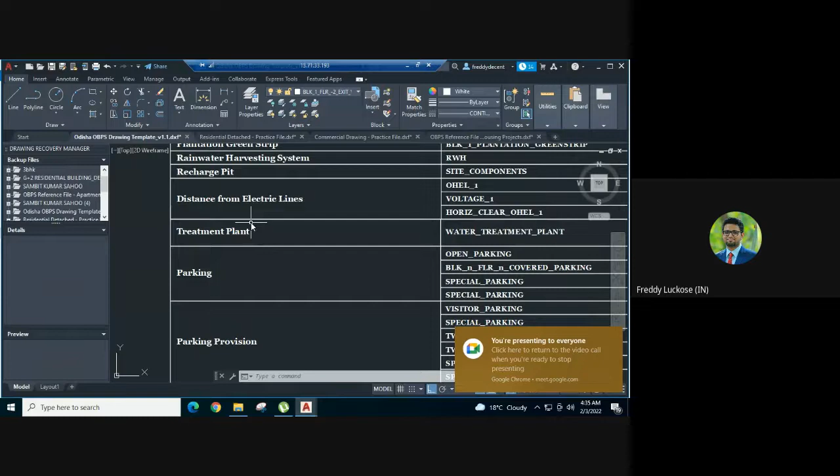The next provision that we look at is treatment plant. If your project has a water treatment plant or sewage treatment plant, you will use the layer name water underscore treatment underscore plant. For water treatment, it is color code 1. For sewage treatment plant, it is color code 2.

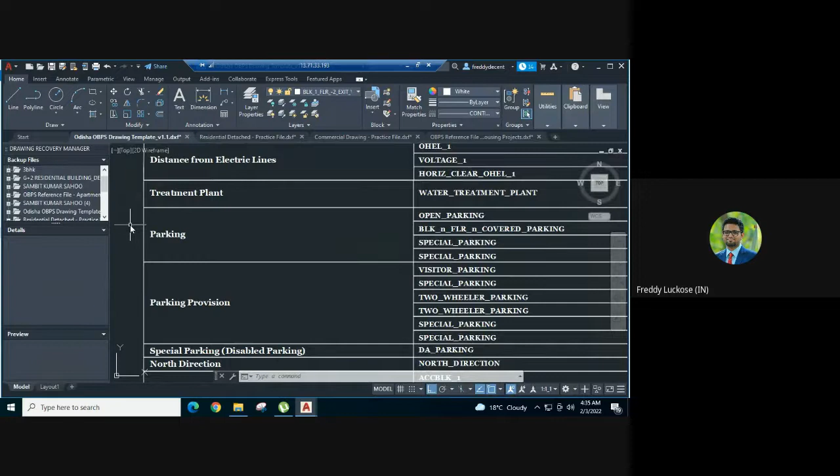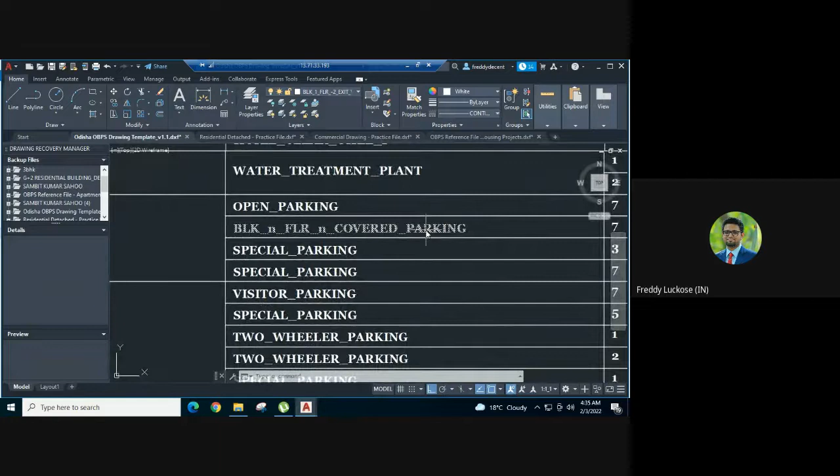Moving on, coming into one of the important features that we have in bylaws, that is the parking type. There are 4 different parking types that you can make in Sujog OBPS: open parking, basement, stilt, and rooftop parking. Based on your design, you can select either one or multiple according to your design, and you can make the required polygons to show the area of your parking.

If you have open parking, you will use the layer name open underscore parking. Similarly, for basement, it is block 1, whatever the block is, and floor, it will be -1, -2, -3, but it will have minus as a factor here. Then if it is stilt parking, you will use special underscore parking with color code 3. And if it is rooftop parking, you will use the same layer name, but it will be color code 7.

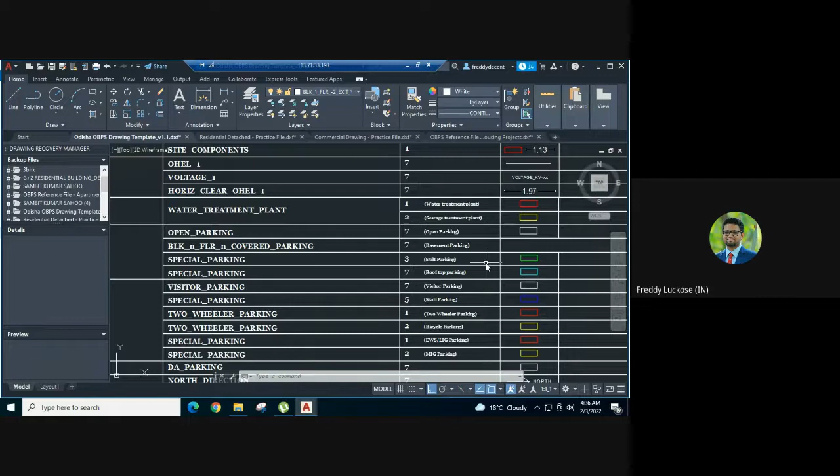So based on the polygon and the layer name that you make here, the system will calculate the total parking requirement. And if the combination of these different parking types meets the total parking requirement, the scrutiny will get accepted.

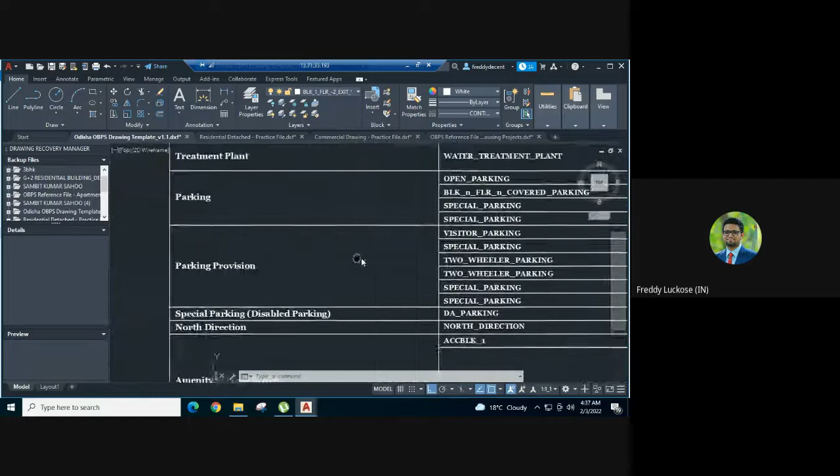Moving ahead, we also have different parking provisions. These will get activated automatically based on the bylaws and the project type that you are making. If in your project visitor parking is mandatory, you can use the layer name visitor underscore parking with color code 7. Similarly, we have layer names for staff parking, two-wheeler parking, bicycle parking, EWS LIG, and MIG parking. Based on the mandatory requirement according to bylaws, this will get automatically detected, and you will have to provide the polygons on top of the parking type.

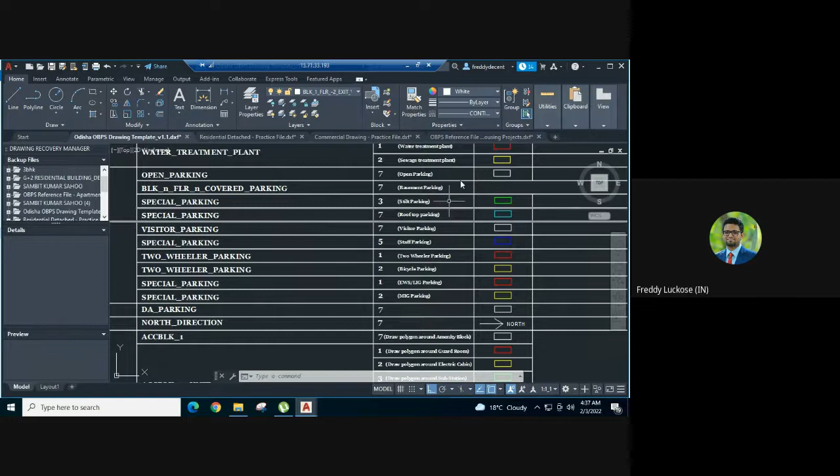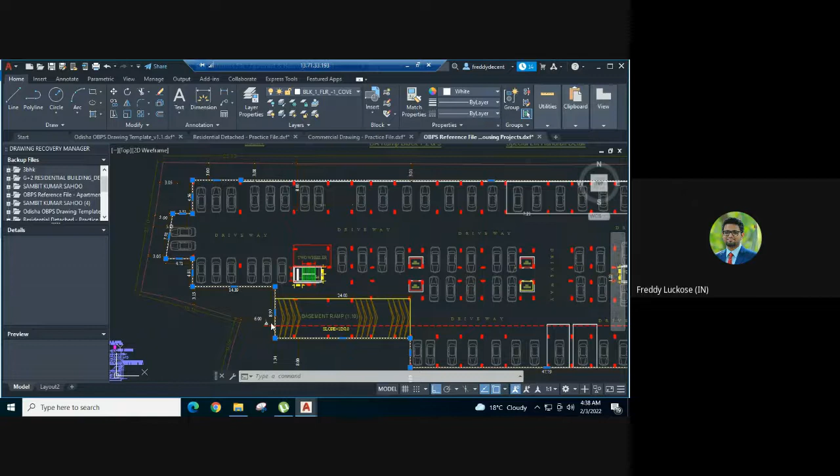So if I could show an example, this is an apartment project which has a basement and -1 floor. The first thing we do is show the entire parking area for this project. I have selected this layer that I've already made, called block 1 floor -1 covered parking, and this denotes the basement parking area, with color code 7. Inside it, for all the different parking provisions, I've also made a polygon, and that is meant for the two-wheeler parking provisions.

As you can see, I've made a polygon for two-wheeler parking, and the color code is 1.

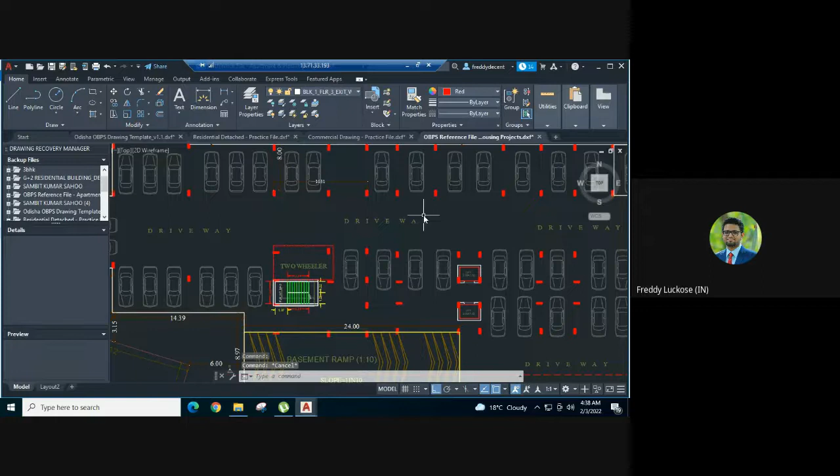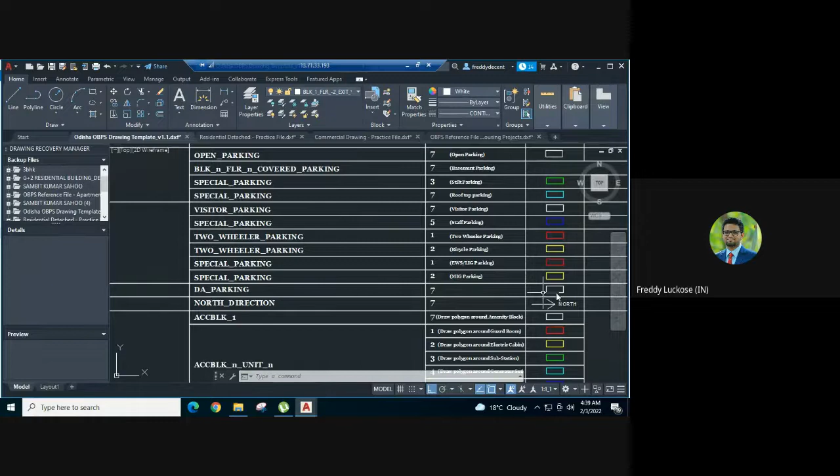Now moving ahead, we have the special parking or the disabled parking provision. There are 2 components to this. One is the polygon that you have to make for the DA parking count and the width. Based on the area of this polygon and the width, the system will scrutinize and give accepted or rejected.

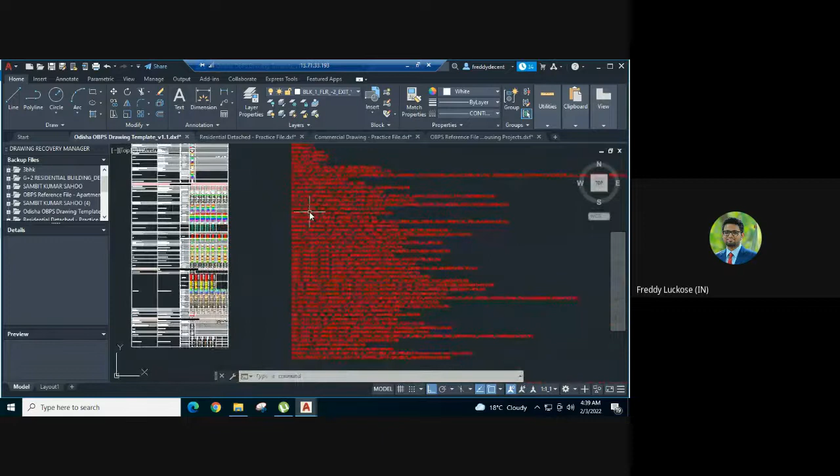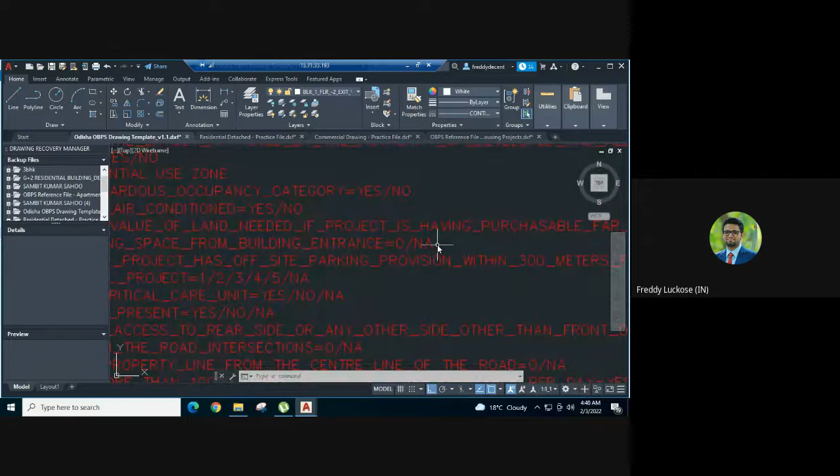Also, we have the maximum distance from the main entrance. That aspect is getting covered in the plan info. If you see the plan info, there will be a question related to this: distance of DA parking space from the building entrance. You have to give the maximum distance that you have to provide, the value for that. If DA parking is not required in your project according to bylaws, you will give the value as NA.

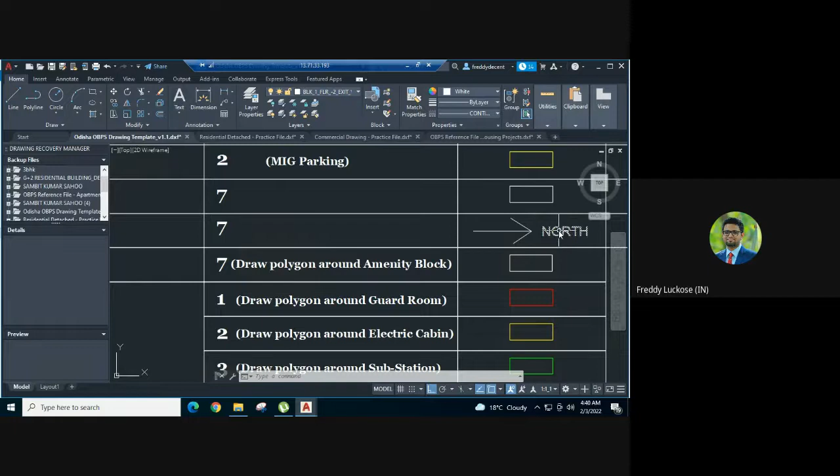North direction is a simple feature where you just copy paste these two components: one is the text and one is the symbol that we have made. Just change it according to the direction of your site. And a point to keep in mind, every text that you make in OBPS, any kind of text you require, like voltage or rainwater harvesting, all of this has to be in M text.

Now coming to amenity in open space, these are the set of amenities that you can make inside your site. According to the bylaws, if it is coming less than 10 square meter, it will not get calculated into the coverage area. If it crosses 10 square meter, it will still be accepted by the scrutiny engine, but it will get added to the coverage area.

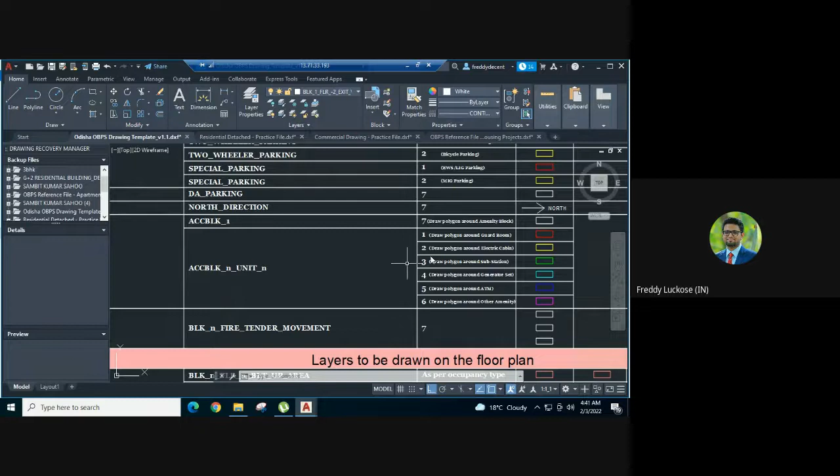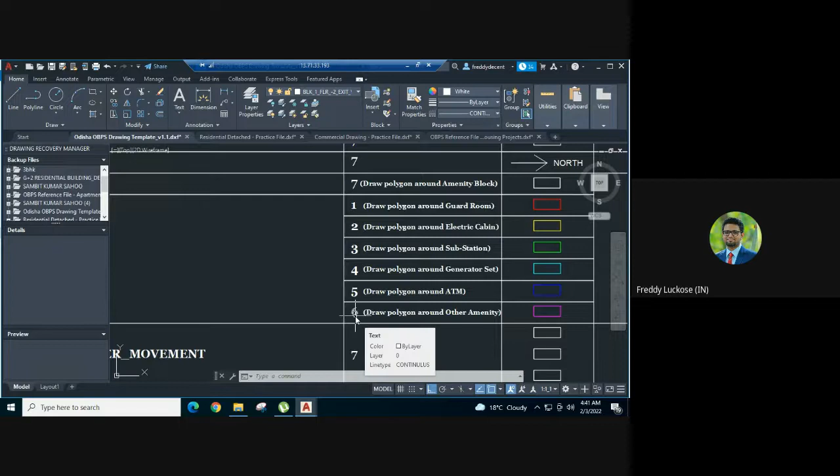Based on the amenity you want to provide, you can use the layer name ACCBLK_1 unit, whatever units you have. If you have two different units, you will have to provide 1 and 2 accordingly. For guard room, you'll use color code 1, electric cabin 2, substation 3, generator set 4, ATM 5, and if there is any other amenity, you can provide it as 6.

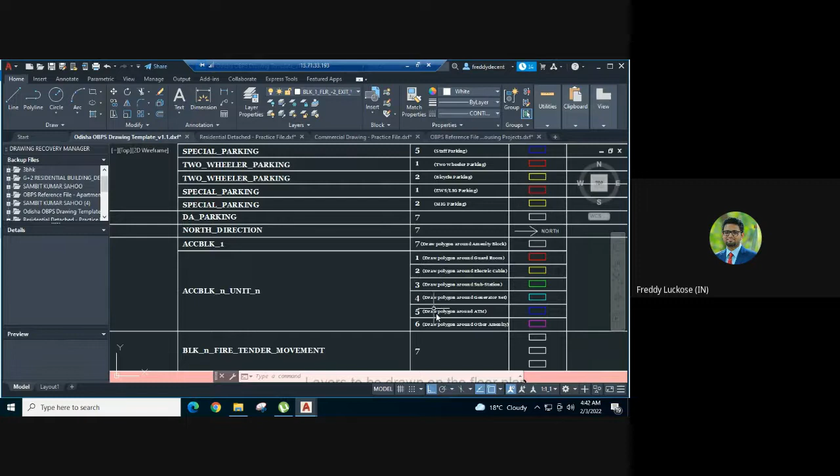And if all these provisions are coming under a single unit or a single block, you will name that block as ACCBLK_1, and it will come as color code 7. Inside it, it will house different provisions based on your design and the applicability.

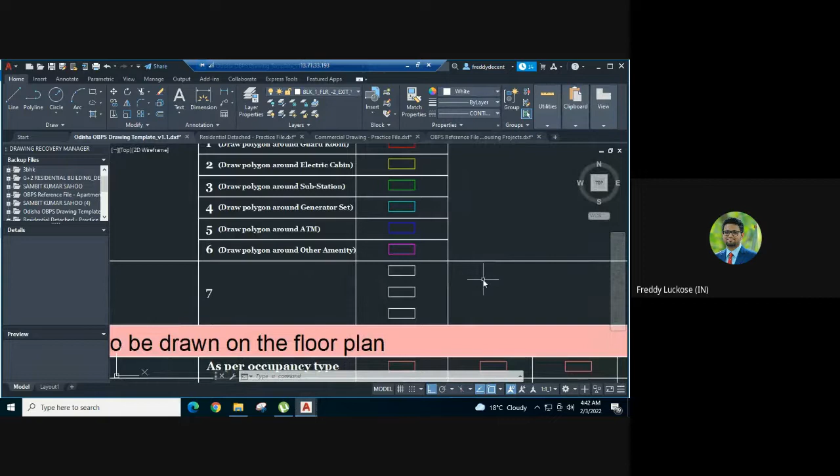The last component in site plan is the fire tender movement or the vehicular access within site. For that, you have to make a layer name called block 1 fire tender movement. It should have a color code 7, and it will be a polygon that you have to make, and the system will automatically calculate the distance.

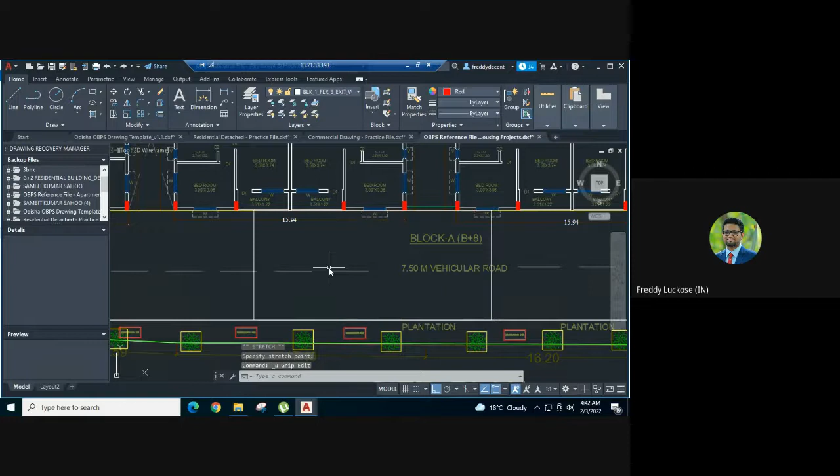So if I show you the reference document, inside the site plan, to showcase the vehicular access within site, I made a polygon. The length could be any of the provision, it doesn't matter, it could be of any shape, but the only point to keep in mind is the road width should be maintained. So the system will calculate the width according to the polygon you make, and it will give accepted or rejected based on the site. For block 1, I've made this polygon, block 1 fire tender movement.

Similarly, for block 3 and for block 2 as well.

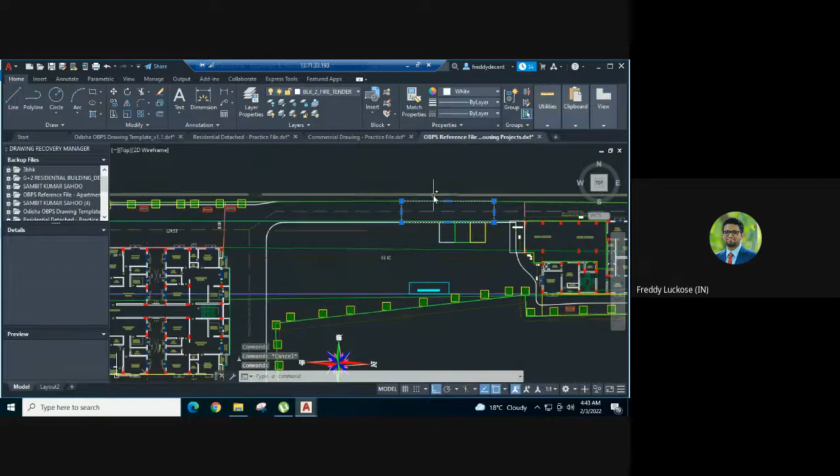This concludes the site plan provisions. We'll be going into the floor plan in the next video.